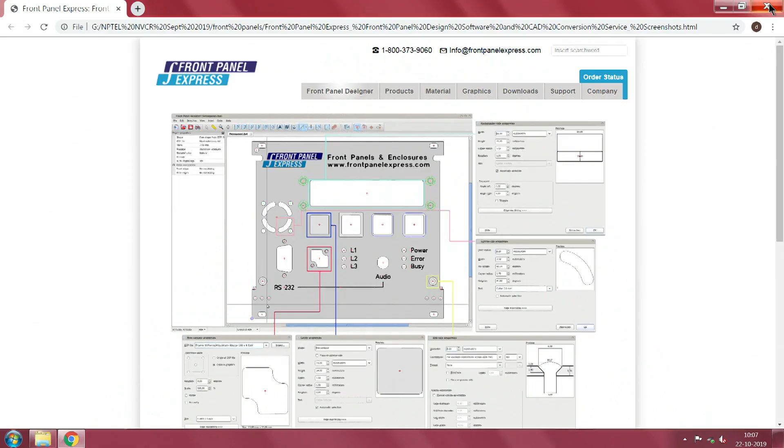The issue is it needs very complicated and highly skilled operations. If you remember, I don't know whether I have shown you or not, all just for making this small timer, they have gone through a large number of these operations. I will quickly go through this.

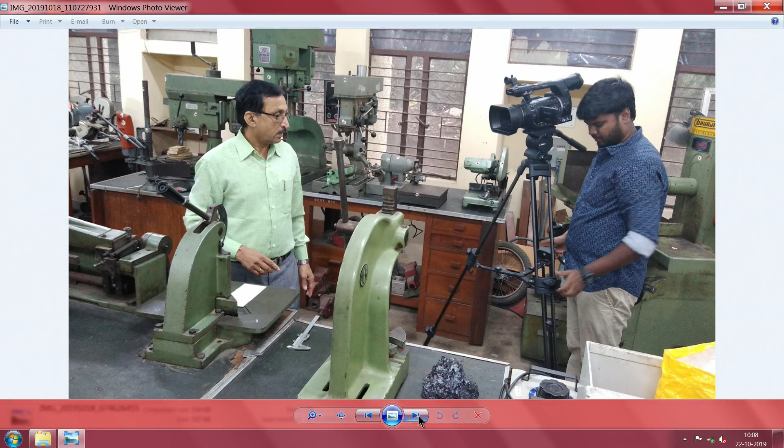It is just saying we can make the timer in the conventional way. Now we will take it to the workshop. I was just showing how it is. The difference being, instead of going through that elaborate calculation and so on, we have made a template, stuck it on a bit of raw material, and we are going to make all these things as they are. This is what I had shown you.

This particular blank, if you see there at this point, is the blank which he has already kept on the machine. This machine was used for making the blank, it is kept here. Then we have something here, and of course this you know what it is. The video follows afterwards.

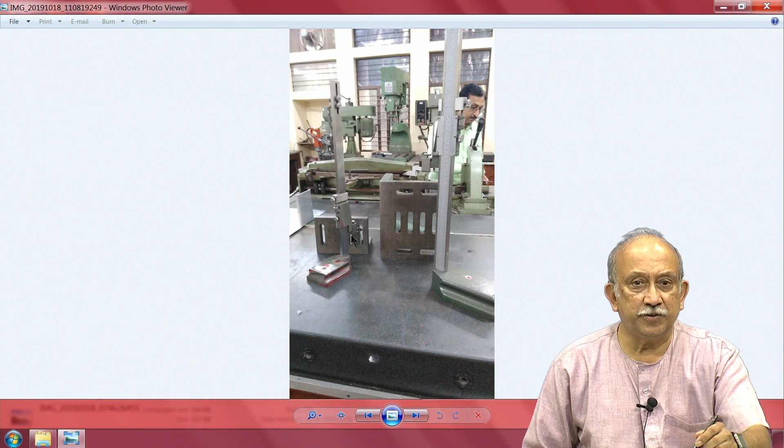Now, one thing you have to notice is that a 45 degree or angle thing is very easy to generate in CAD, but it is not easy to do the marking of these things manually. Standard basic marking, the next demo will show you there is no issue about horizontal lines, and vertical lines also, no issue.

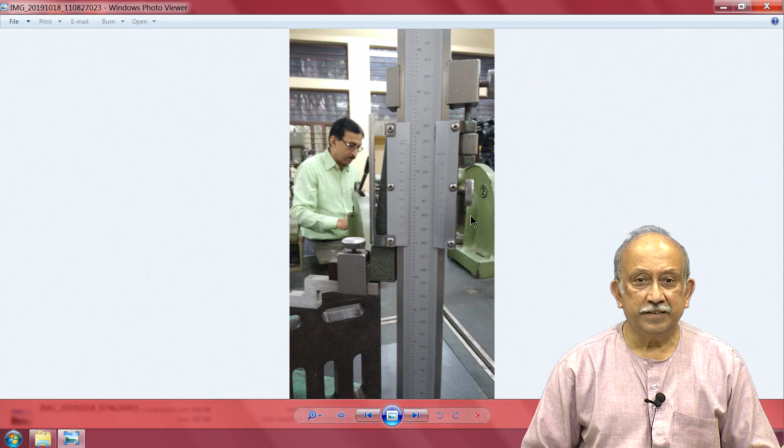However, if you want to make lines of some arbitrary or derived values due to procedures in laying out, it is not easy to make those things, because it is not even easy to read these things.

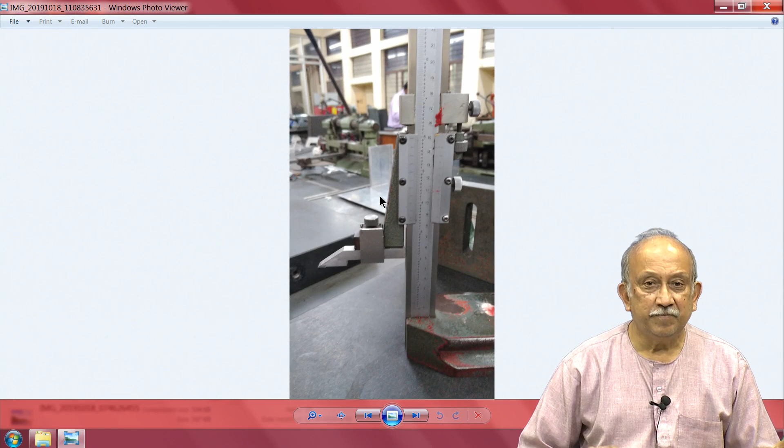This one in fact has a provision for attaching a lens and lighting, and one has to be really sharp, and a tremendous amount of calibration is required to see that this marking edge has to exactly coincide as per the scale that it shows here.

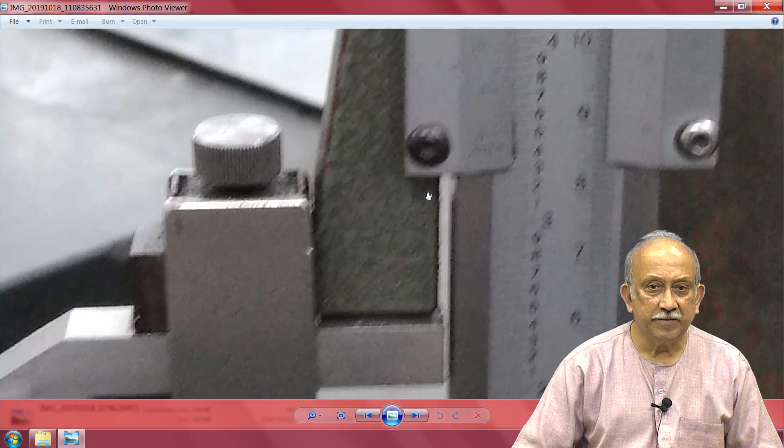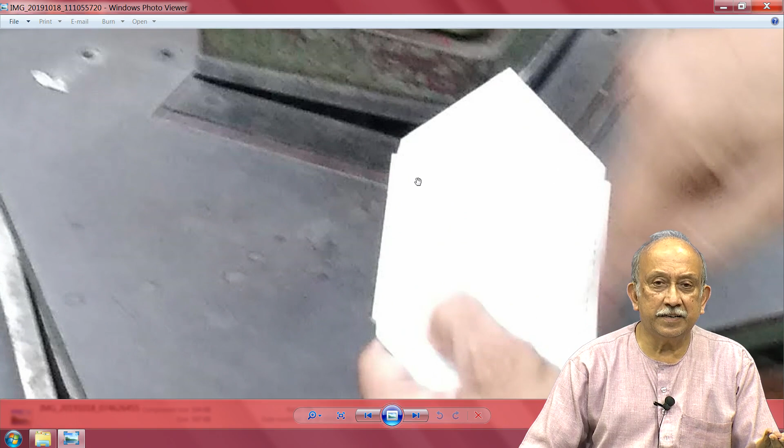Not easy to read, not easy to make, everything is not easy. In contrast, if we were to just take a simple printout from any printer, the normal printers we have at home or even in the office, the accuracy is about the same depending on the condition of the printer and all that.

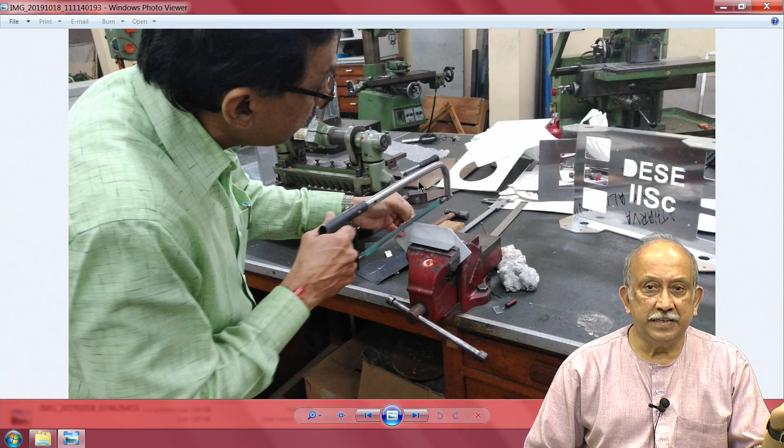A minimum of 0.1 to 0.2 millimeters you will get over the total length of 290 millimeters, actually it is 297. Afterwards, once these are marked here, you see there is a bending line, then there is a slot that is marked here, and it is very easy for us to follow these things.

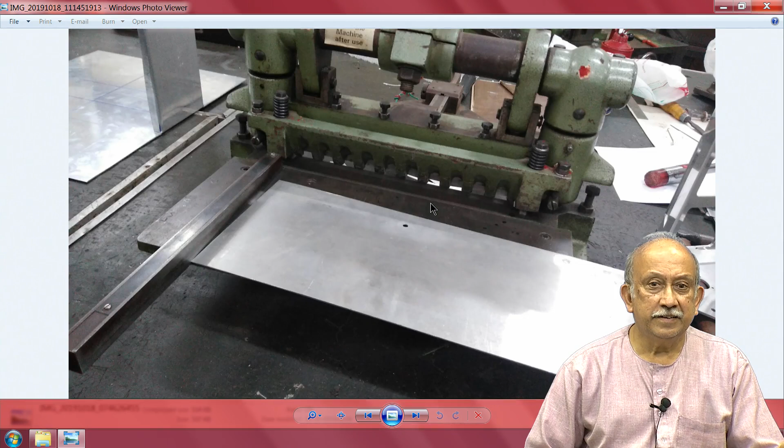I will say, you see here there is something very tiny, a device, any small thing can be done, and see there he is trying to set up the machine. After that, necessary reliefs have been made, there is a small relief here, we can see it here.

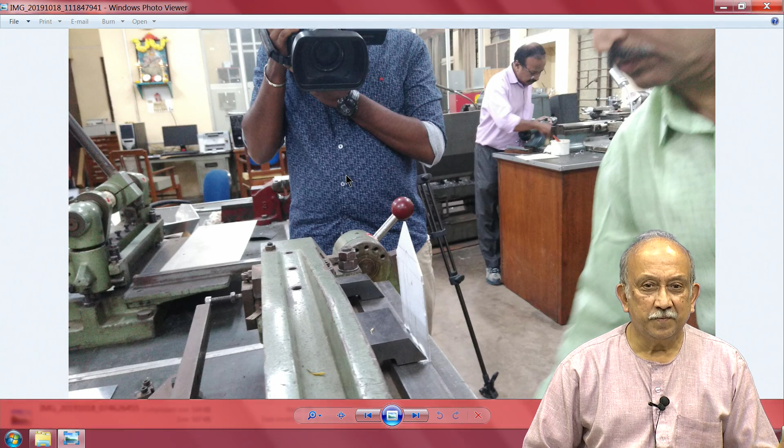He has used a normal hacksaw, and the critical thing we need to observe is the wanted limb versus the other limb, where things can change a bit. Same thing here, if you want to ensure that these limb dimensions and all come properly, it is very easy for us if you have a template.

Else you end up having to mark it. You see here quite easily he has done it. The next set of slides will show you this, and finally he is measuring whether the dimensions are okay or not. This being the first phase,

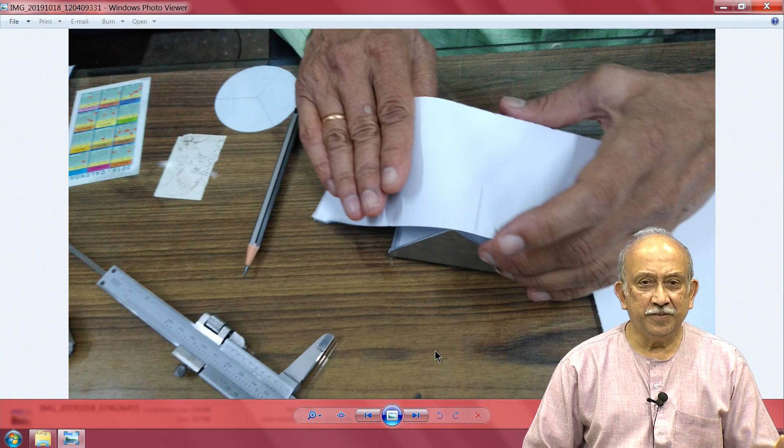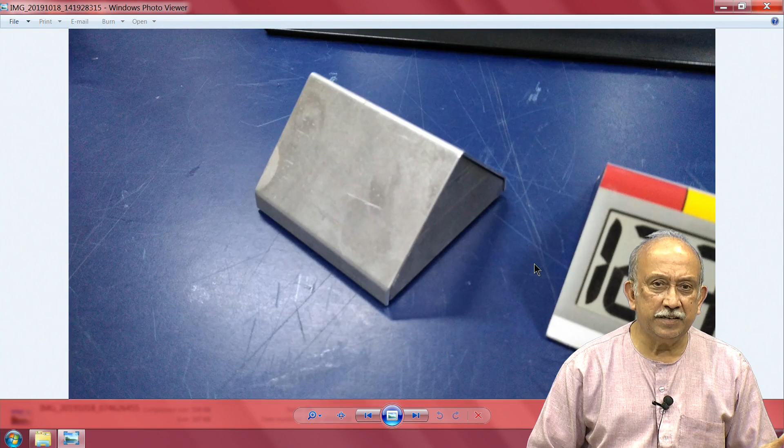let me be honest, they were not to my satisfaction. So, this is not encouraged, but still, one part which comes last, the final cover, he has tried to take an equivalent sheet and then bend it. You have seen it here, he has tried to cover it and made something which is okay, tolerable, but not to the standards I expect.

This did not come out well, and even here, there is a little bit of projection and the radii did not match, and probably quite a bit of other stuff.

Just to show you the conventional way and the difficulty in making it, I thought I will present this to you. It is also useful in case you really have access to a workshop or a professional shop, and you are one of those people who enjoys highly technical items, a serious hobbyist, or one of those hackers who enjoys taking things under control.

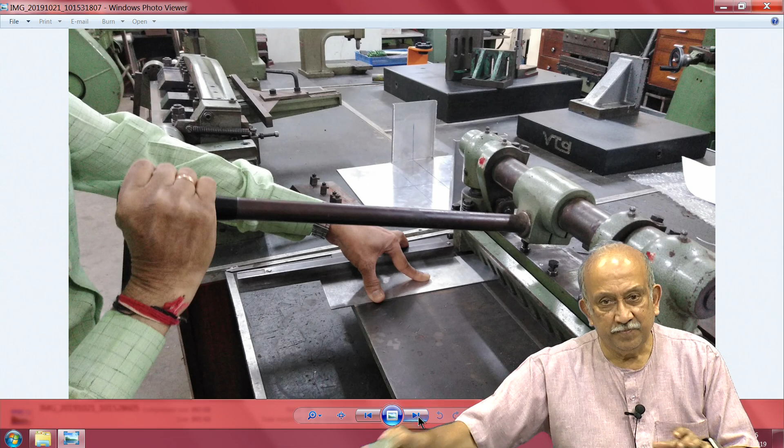The point being, somebody has to give that person an actual drawing of the part we want. So I made a drawing of this part, and it is a part drawing. I will show you back at where the drawing is, then probably you will appreciate it better.

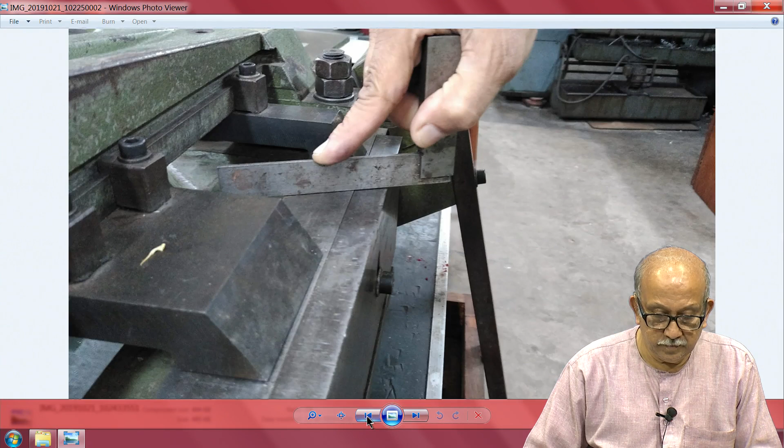Let me go through. See here, if you see this now, I wanted this limb to be approximately something here and something here. Unfortunately, things like 'I wanted this much, that much' does not make much sense to a person who has to fabricate it as per your instructions.

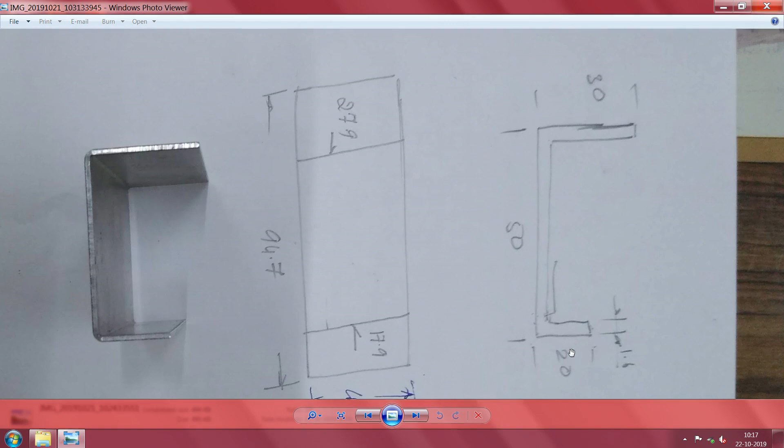So the easiest way for us is to make a sketch. You see here, this sketch says this limb must be 20 millimeters, and in production we also add what is called a tolerance, a fit, and an allowance on this. Same thing, this limb has to be 50 and this limb has to be 30.

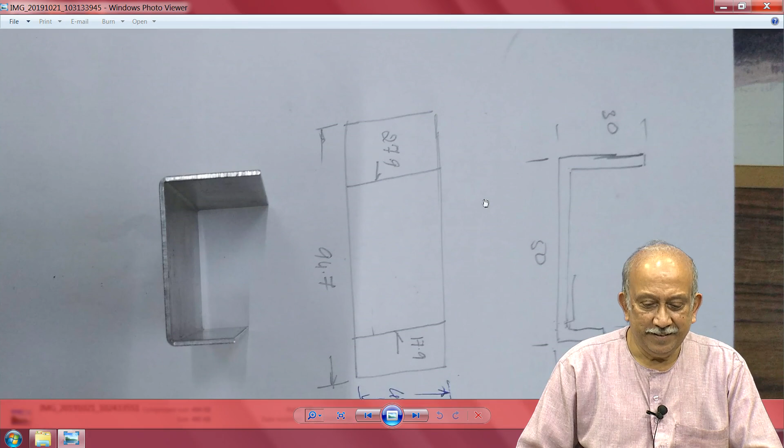Now comes the important aspect of how to calculate bend length. You see here, either way I go, I end up with a peculiar 20 plus 30, 50 and 50, 100 millimeters. We know very well it is probably not 100 millimeters, but then we also have a small thickness here.

Can you see here, 1.6 millimeters. So how do we carry out this calculation? Traditionally, the internal dimensions are added up. This represents the 20 mm limb, this represents the 50 mm limb minus 2 thicknesses, and this represents the 30 mm limb. These are added up, and added to that a factor called the bending allowance is given. In our parlance we call it Z because we are used to it.

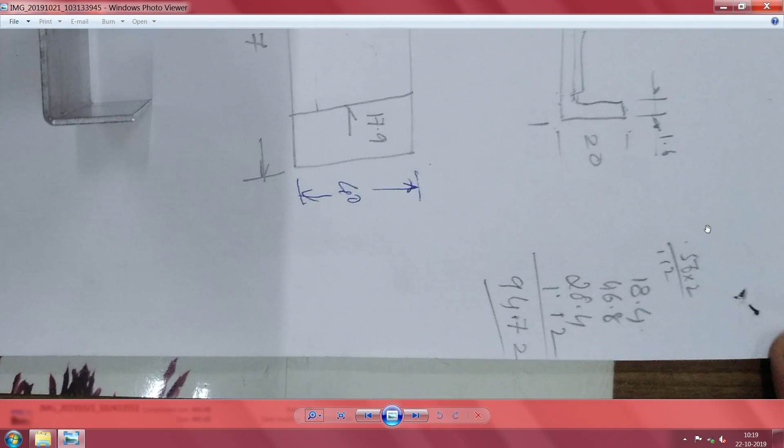That depends a lot on the thickness of the material and how it is going to be clamped inside, the minimum bending radius that can be achieved safely, and this is an empirical constant. It depends very much on the type of material and various other factors related to how the material gets squeezed in between, the direction of grain, and the hardness treatment that has been given to it. Soft materials behave differently from brittle materials.

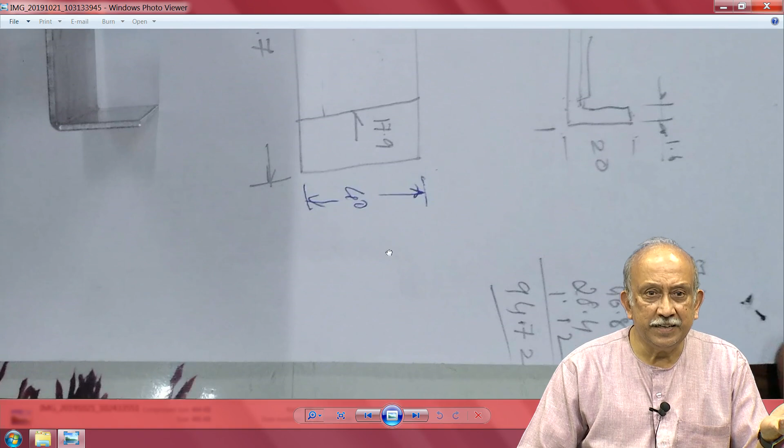In the end, we do have a beautiful piece here. Can you see something about it? If you see carefully, this piece does have an internal radius, whether you like it or not, depending on how we have clamped it, plus a thickness. If you just take the internal dimension, it will start from this point; internal dimension will start from that point. Alternatively, if you take an external dimension, there are two ways of doing it.

If you take the external dimension, the total will come to 100 millimeters, and then you have 94.7. So 100 minus this 94.7 will give you a deductible allowance. That is a lot of difference, have you seen here. So it will come to 5.3, which will come to approximately 2.65. So we need to deduct 2.65 from both these items.

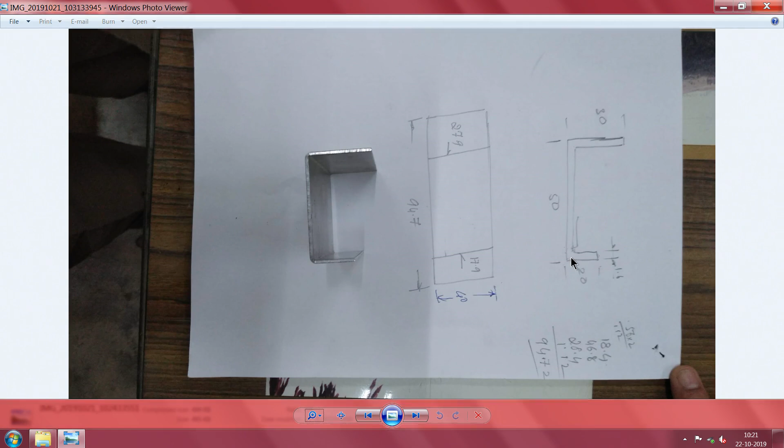Some places follow such methods, but in our case, because of the issue about clamping it, which I am going to come back to, you see here a designation. The designation here shows that this part is clamped inside the machine, and here it says in another way, no, this part is clamped inside the machine. I will come back to it later.

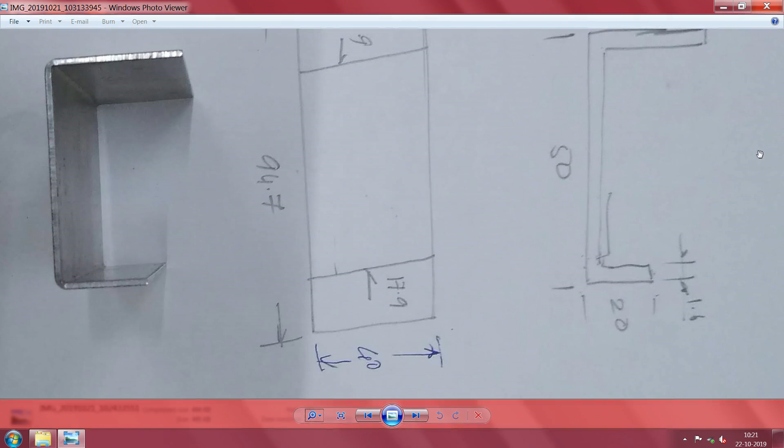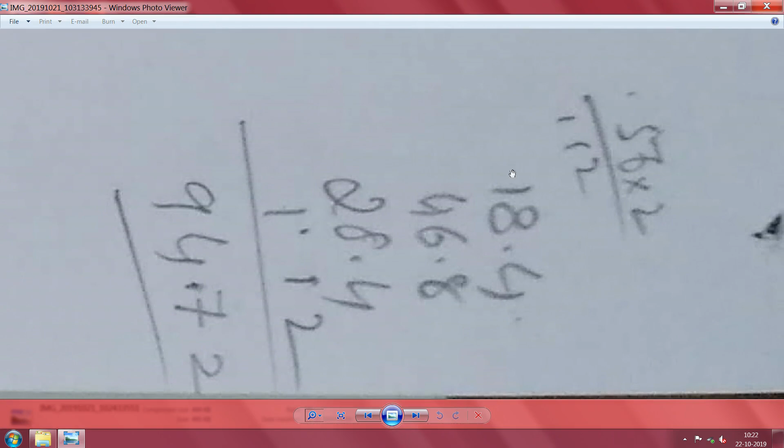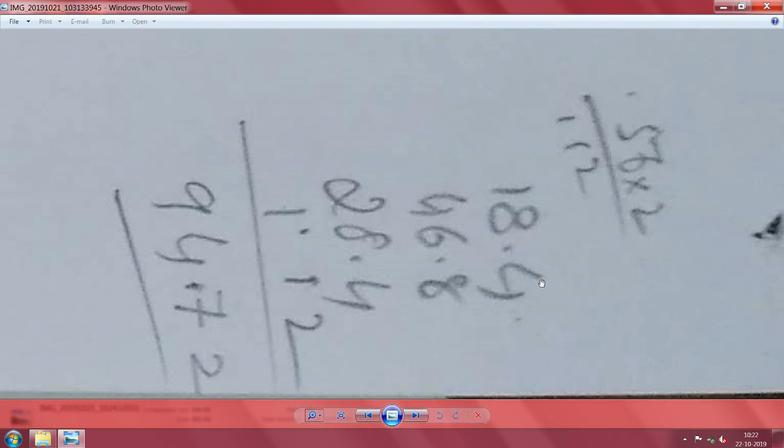Using all this, we traditionally have been using this 0.56, related to a 1.6 millimeter material with an internal radius of 0.5, done in our folding machine, where the length that is not to be altered will be inside the clamp, inside the fingers. So instantly if you see, if you add 18.4 to this thing, it will come to approximately 18.96, which in some other context makes sense for us.

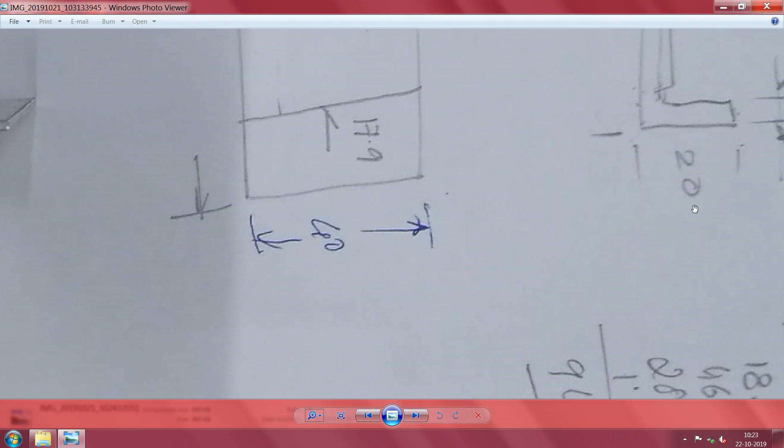But you see here, though it says internal 18.4, something else is marked here, 17.9. So why is 17.9 marked here? This particular thing is related to the way our machines work. We have a finger which holds the immovable part, then after that the internal radius is added to that. So if we say internal dimension minus that 0.5, we need to mark a line here. That is how it has come. So we have an internal dimension of 18.4 minus 0.5, 17.9 is marked here. The advantage of this is, now this line is used for clamping it.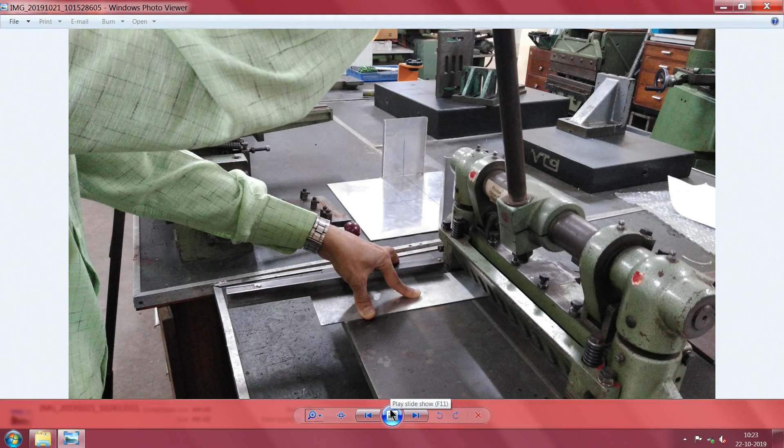Now I will get back to this. You see here we have a developed length which has been calculated, and he is trying to shear it to the necessary developed length.

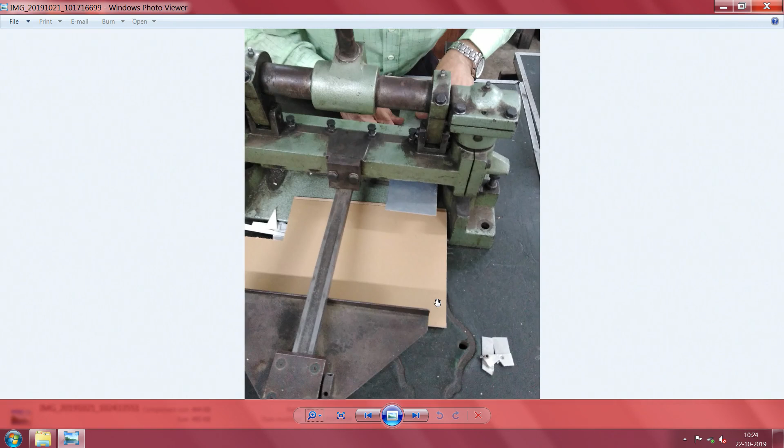This is the open thing, and there are fingers here which clamp it, and more importantly there is a straight edge and a backstop. Right now the backstop has been retracted. This is the machine at the back. After carrying out all the necessary markings and calculating the length, it has been fed to the machine.

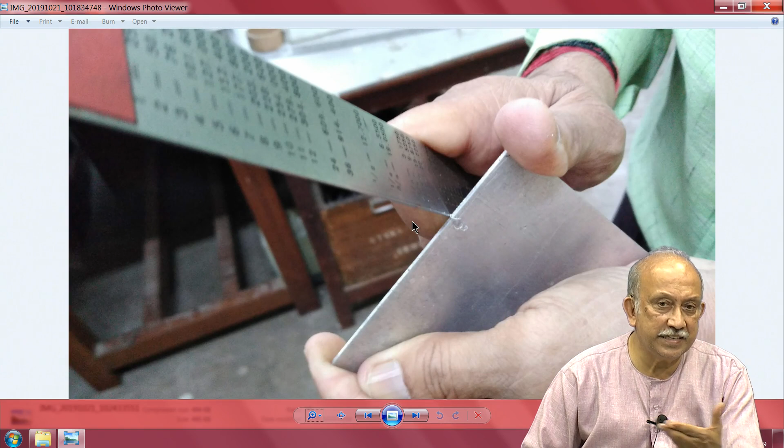This is the wanted piece we want, which has come out of the machine. He is picking it up and doing various things, including deburring. Unless the machines are new laser cut machines or something, traditionally a burr is always formed.

So here we have a scale or a straight edge. In this case, it is a damaged one, hence you see this red marking saying do not use it for measurements, and he is using it to make sure there are no burrs on that.

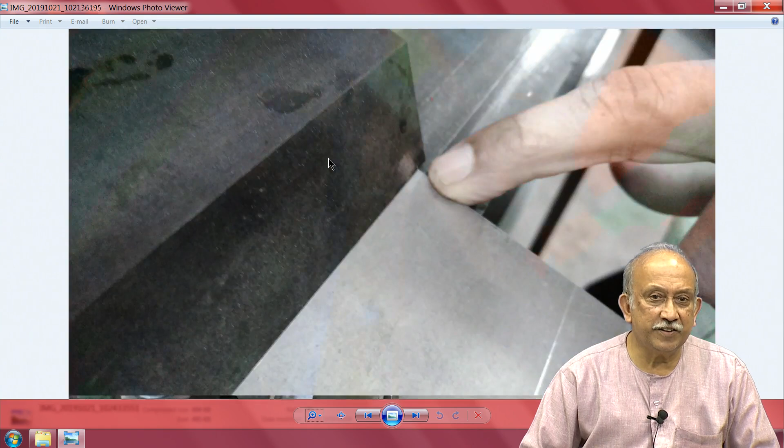Sorry for going through this in a very quick way. The point I wanted to make from the beginning is, after doing all these things, the most important thing is trying to make a marking. So what we wanted to do is mark it here using a vernier height gauge.

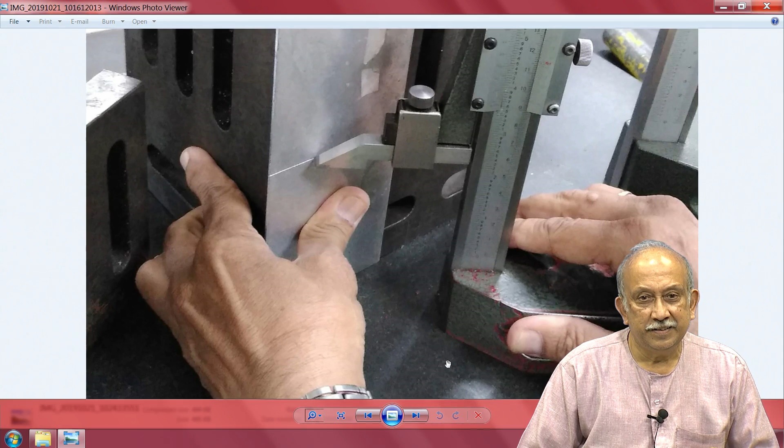Vernier height gauges are normally used only in very accurate work, but the problem is everything depends on how well this bottom - it is a granite stone - how well it is maintained, how well it is lubricated and kept, and something equally important is how well the marking edge is maintained.

Now you see already it has a thickness, and it is already showing a thickness, so it is no longer a zero thickness line, and not a very comfortable way of trying to handle it.

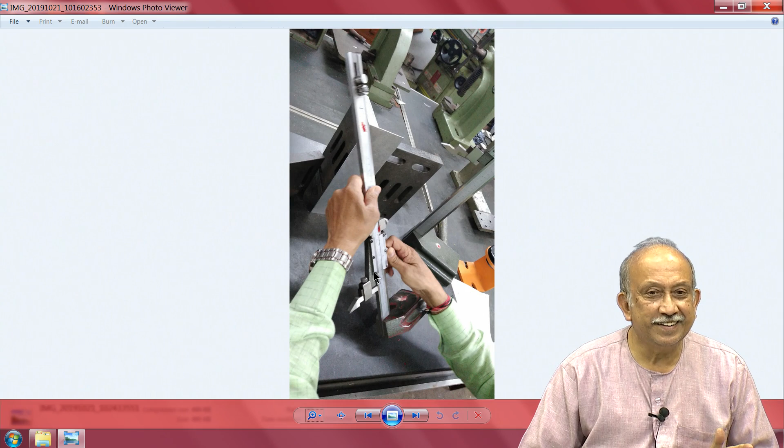See here, the operator is forced to tilt it, take it off from the stand and try to look at it - is this how it is? Not the best practice.

So here what is done is, normally the proper way is it should be at eye level and you should never take it off from the surface. With these restrictions, it is not easy to actually read and mark things.

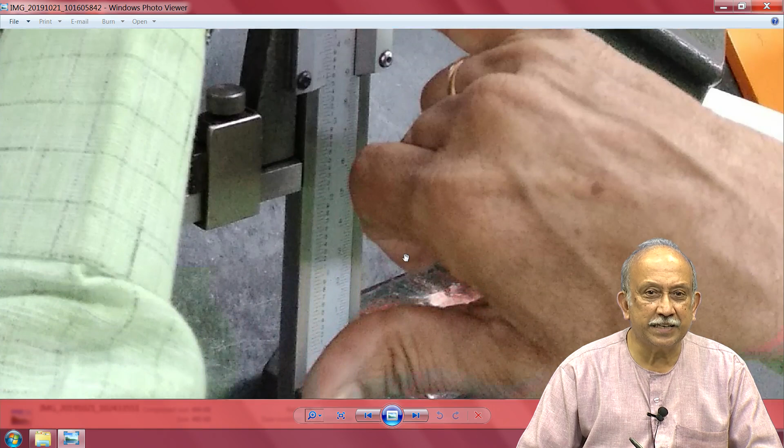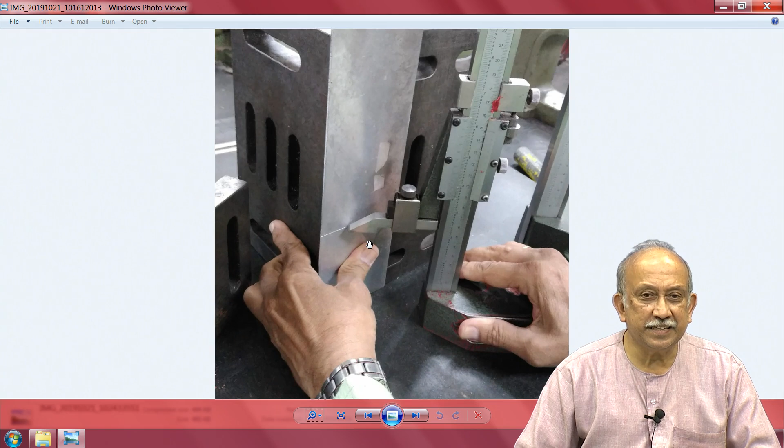See here, he is trying to point out to me saying, sir, you say this is the one, and eventually the marking is done here. Can you see here? This is what I was trying to show you. Not easy to make the marking, but it does get done.

Somewhere all the pictures are there, a larger thing. I'll get back to that and show you again. Sorry for this, because I am forced to go back and forward.

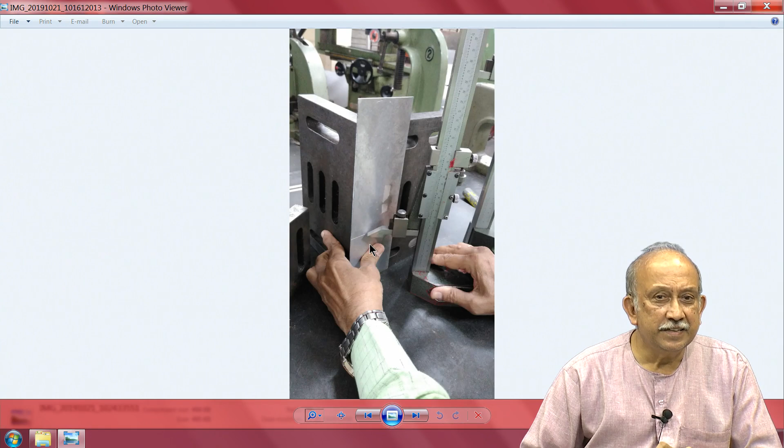Now, having sheared this on the machine, having done the marking, we now go on to the next operation, saying we have to get ready for bending.

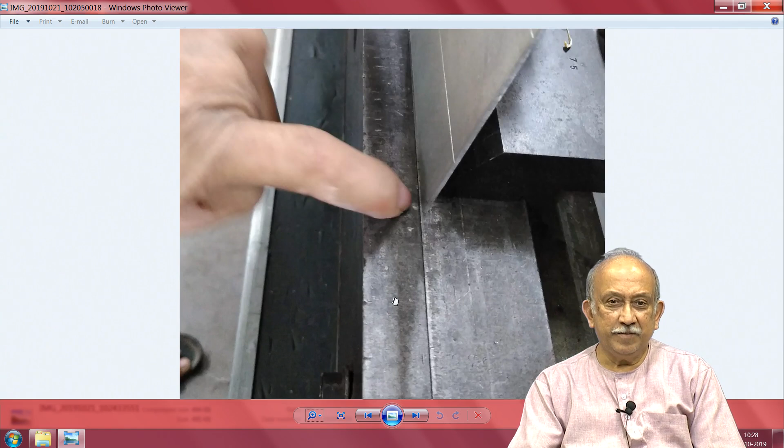You see here, this is a folding machine, and there is a long taper, and then you can see these two lines are there, and this is the clamping finger. What that clamping finger does is, it holds the material underneath.

My colleague the operator is trying to show me how to move the finger back. To move the finger back, he is supposed to give that 0.5 millimeters plus one thickness of the material. So this is the thickness. After that, he is visually very skilled at that 0.5 millimeters thing.

He is now positioning that finger which is clamping - you may not be able to see the line. This material is now under the finger, that clamping finger. Now you see here, maybe you will be able to see a little.

Now you see here what he has done is, this is the thickness of the material, then that 0.5 millimeters, total approximately 2 millimeters are there, and these limbs can be changed - it is a modular device.

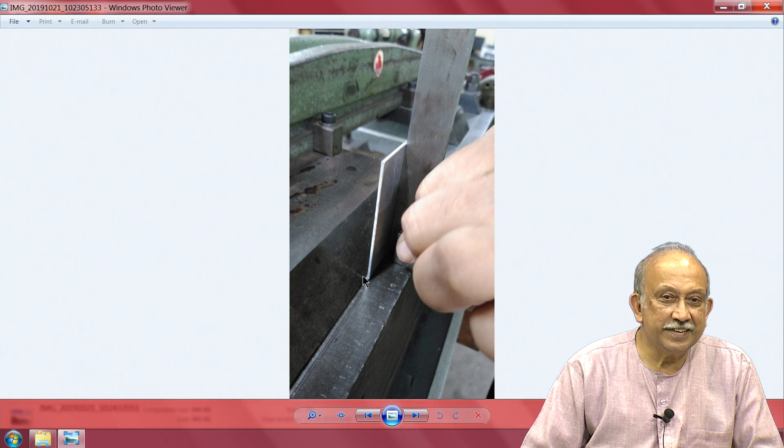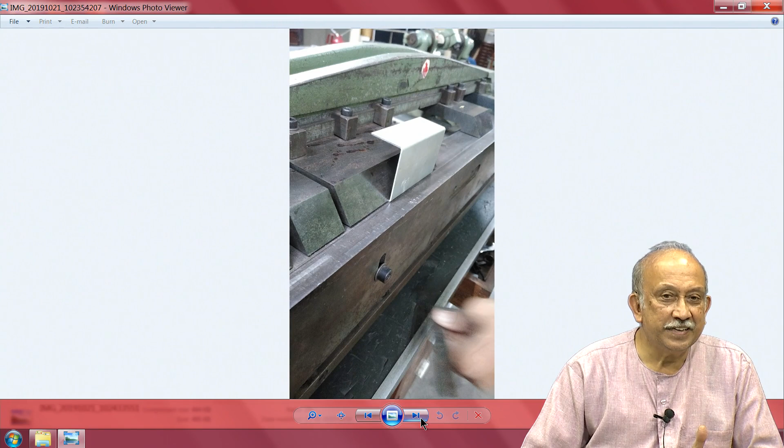Once it is level, after the bending, the limb is formed well. After it is formed, he is taking a try square and checking that we have a perfect 90 degrees. Can you see here? It has been done twice.

Other direction also is checking this, and now basically the job is ready. If we have done the calculations right, we have taken the inside dimensions, then added the extra bending allowance, that is 0.56, then the machine has been set properly, and a limb of 20 mm, presto, we have it.

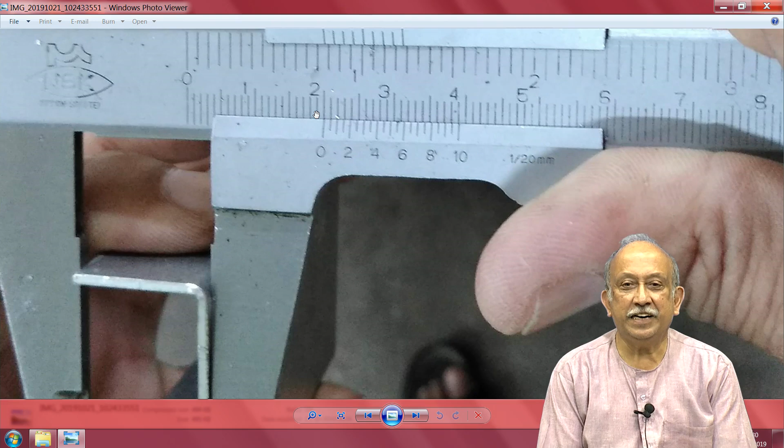Good. This looks a little like a technician's trade, is it not? No, it is not a technician's trade. If you want something to work, you need to be familiar with it. Same thing with the 30 millimeter limb, same thing with the 50 millimeter limb. All the limbs have perfectly meshed. So, what I wanted, I got.

And why this? The focus is, this is a very complicated way of doing it. One of the first things is, you have to determine the actual part, the dimensions of the part, which is where I feel no, any CAD system will work. Second part of it is how to make the parts fit properly. So, next I will go up.

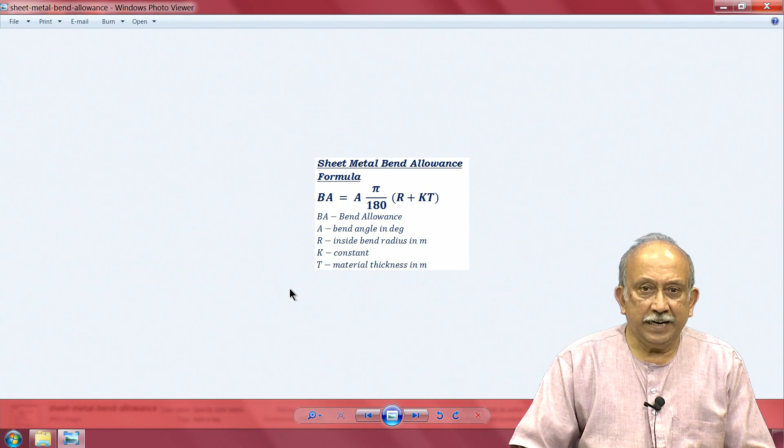To calculate the bending allowance, we have a number of formulae mentioned on the web. In this particular case, we have the inside bend radius, and we have a material thickness. I do not know if here it says meters or millimeters. The important thing we end up with is the K factor.

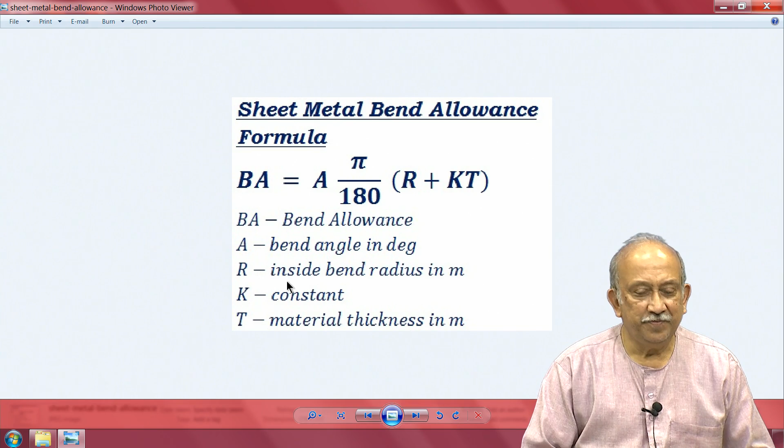Where do we get the constant? Like all other engineering calculations, our part comes to how do we determine this K constant. So, if you go into the thing, I couldn't unfortunately save these things.

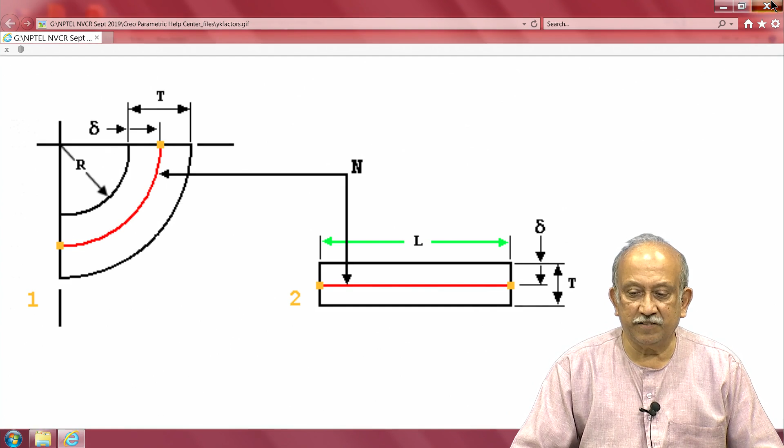A lot seems to depend on where exactly this so-called neutral axis ends up. So, we have still a problem. In this thickness of T, where is the offset of the neutral axis, which is not at all easy to determine. Hence, it is treated empirically, and depending on the type of fabrication and machinery, generally the shop people are familiar with it. It just takes, you know, we use it in one of these things, and then try to do what's best.

You see here we have a little problem. In this case, the neutral axis is shifted to the inner line. So in this case the bend allowance changes dramatically. Yeah, this is what I was looking for, finally got it here, while that was a folding machine which I had shown you.

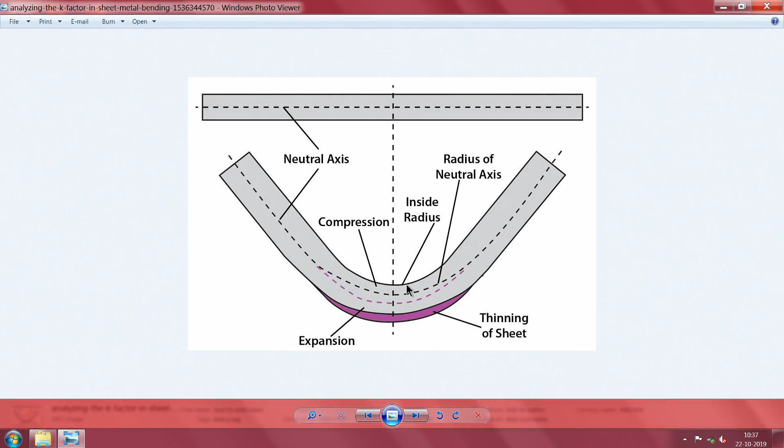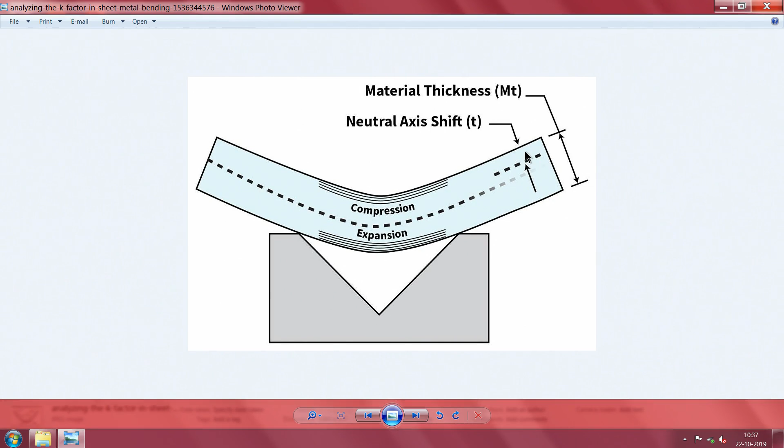So what happens in all these things is one limb gets compressed, another limb gets expanded, and there is a neutral axis shift. This neutral axis shift has to be determined by practice.

And there are a large number of tables here. So we have this generic K factor. Mind you, the word generic again reminds us that we need to make it specific for our particular operation. In this case it says air bending, which I just explained, bottoming meaning it just touches the bottom, coining meaning both sides are squeezed fully.

So up to a certain thickness, where the radius is 0 radius means it is a sharp angle, up to 1 thickness, this is what is used. So generally we are in this area. Mind you, it is a K factor, it is not the bend allowance directly.

So in the case of steel, we know generally most steels come in the work hardened condition. Work hardened condition means as it is rolled or as it is done, it comes into that state. Very rarely are any annealing or such operations carried out. In some very strange specific cases, a little bit of aging is carried out, but never this.

And in the case of aluminum, depending on the content of magnesium and silicon, the material property changes from soft to medium, and some of them can be hardened all the way up. So this K factor keeps changing, and as I told you earlier, it is a lot dependent upon...

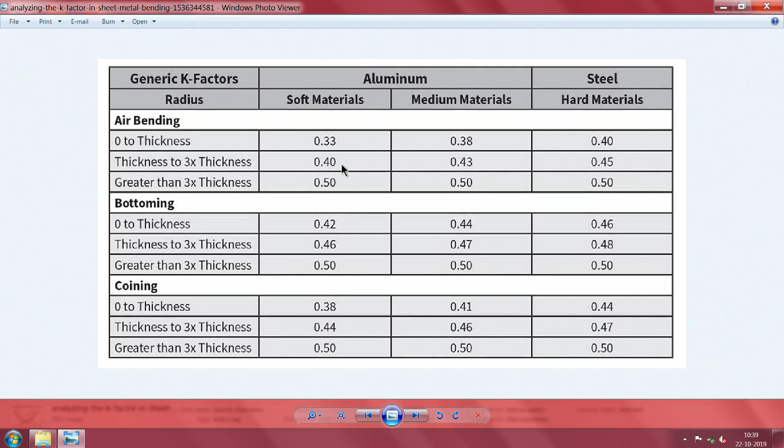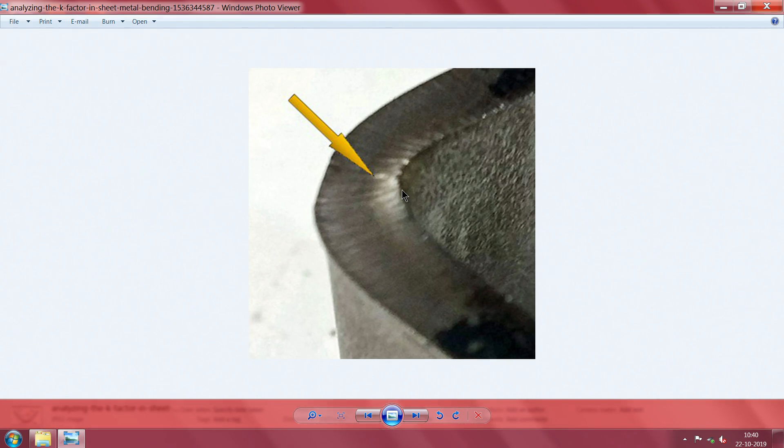the specific working conditions. Here he has given pictures of what happens here. The one outside you can clearly see has got stretch, the one inside there is compression, and whenever we are talking about any of these further operations, we need to be familiar with this.

Oh, it is not clear. It is nothing, it is just that I have tried to take it from various sources, and at this point today I would like to stop. Okay, thank you.